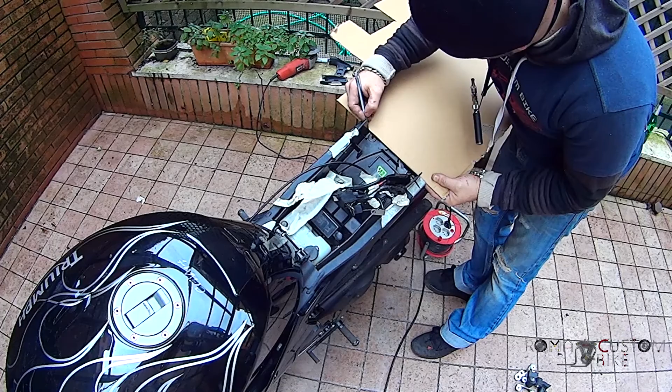In the last episode, while working on the tail's sheet metal, I created a cardboard template for the tail light. It helped me with space management during fabrication and now I need to turn it into a final product. I start by digitalizing the outline of the cardboard template to always have a reference of the available space. Then I like to add the mandatory objects, like the seat lock that we saved from demolition.

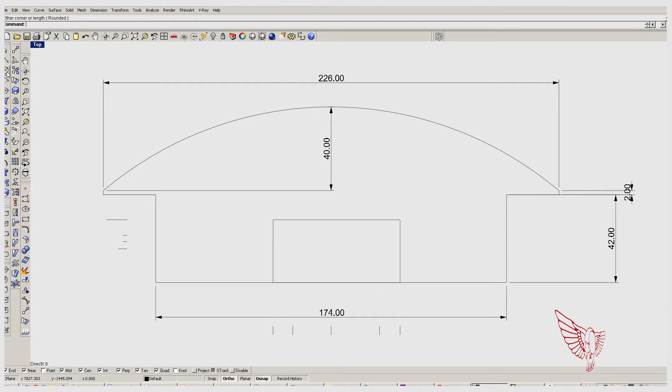Once all fixed parameters are set, it's time to start with the creative design.

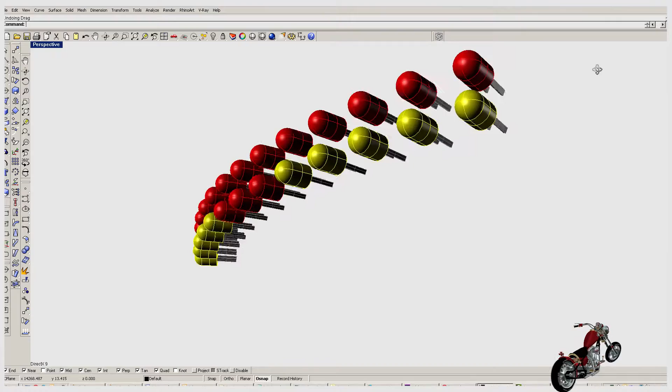I've decided to include all lighting functions in the tail light: the marker light, the stop light and the turn signal. To get this result, I decided to use two rows of LED lights, the top one for the brake light and the bottom one for the turn signals.

I start by drawing the 26 LED lights that constitute the two rows. The first 5 LEDs from both sides of the bottom row will be yellow for the signals. The rest of them will be red.

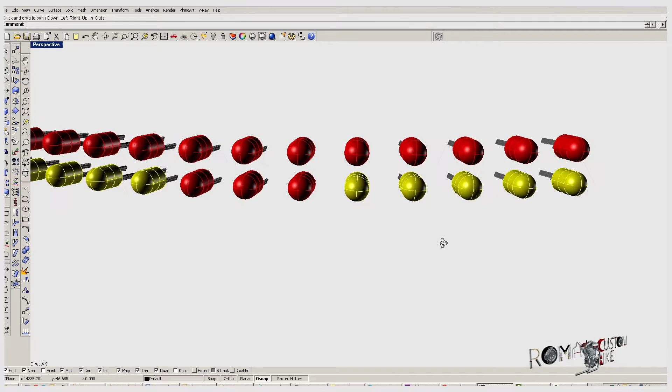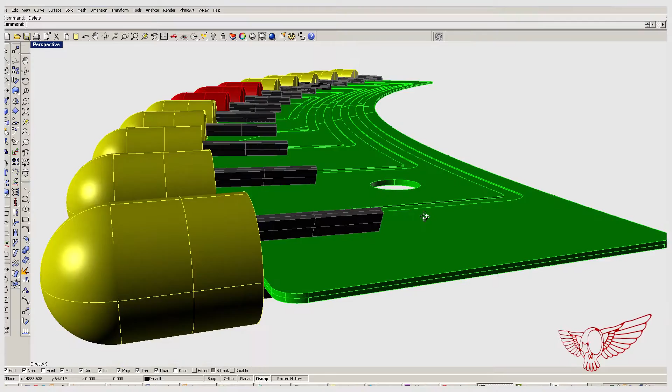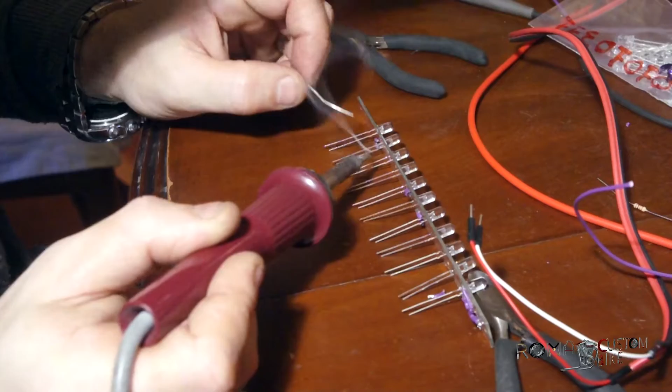With the limited resources at my disposal, I had to figure out an accurate system to install all those LEDs in a small space and with the needed precision. I decided to use a dual-sided PCB board so that I could solder all the cathodes onto one side and control the signal to the anodes independently on the other. We'll get into more detail in the next episode where we'll be talking about all the electronics of the project.

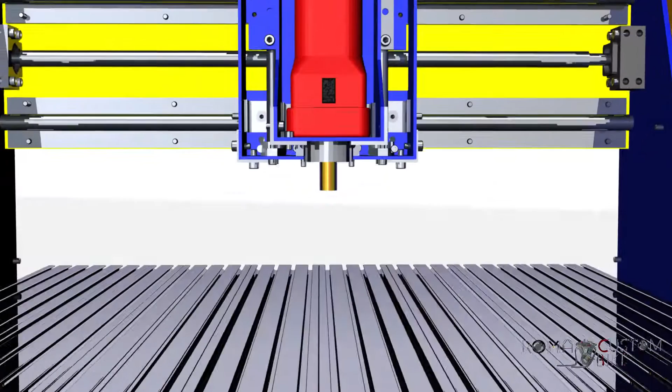Now, let me do a little consideration about CNC machines and their limitations. Even though the objects they create are actually 3D objects, most machines have 3 axes and can be considered like 2.5D. That's because they can move freely onto 2 dimensions, X and Y, but they have limited control over the Z axis. Without a 4th or 5th axis, the end mill can only plunge onto a stock at 90 degrees. For example, my CNC couldn't plunge diagonally into a piece.

So, with these limitations in mind, I decided to split the tail light in 2 halves, split horizontally. This way I can carve the necessary pockets to house all the electronics.

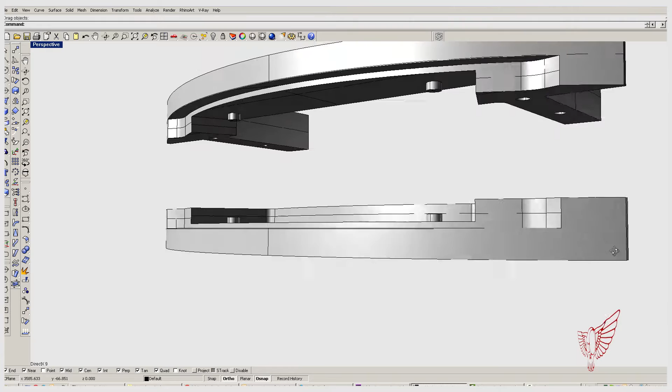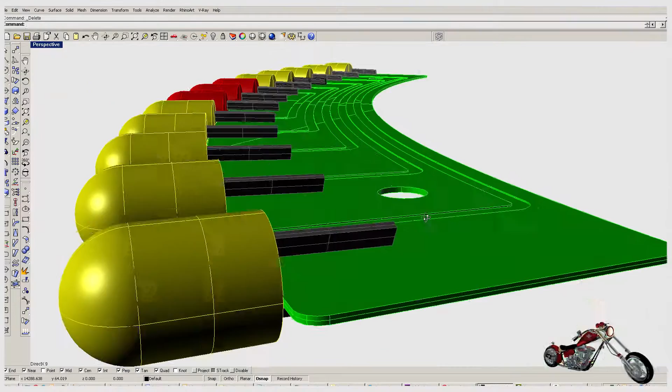Starting with the outline of the bottom half, I extrude a solid object. This represents the stock from which we'll be carving the final product. I've already prepared a 3D model of the PCB with all the LED lights on it so that I can use it as a visual aid for the designing process. This could also be done mathematically, but this way I'm less likely to make a mistake.

To install the PCB inside the tail light, I create a pocket in the aluminum block. In 3D software, this is usually done by subtracting one solid from another.

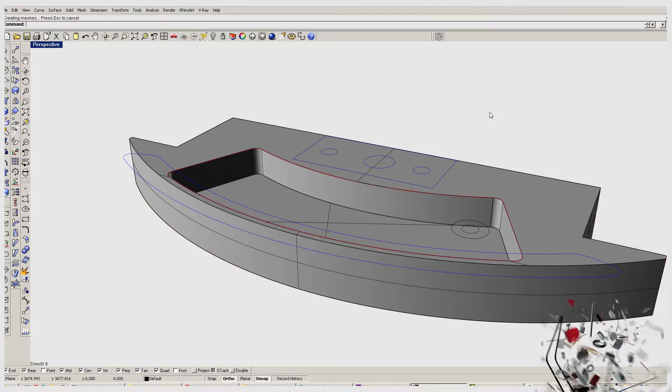Then I add 2 spacers. This will allow the PCB to be fastened to the casing while leaving enough space for the components and for the wiring.

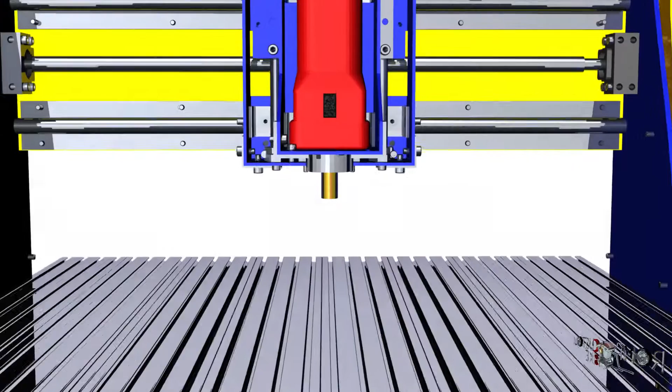Now I have to figure out a way to design the backside so that the light can be seen. As I've mentioned before, my machine can only plunge vertically onto the piece, so I need to come up with some other solution to work the backside of the tail light.

I figured I can make a flat plate with holes for the LED lights and curve it against the shape of the casing. To do this, I create another pocket that can generate an edge that I can use as a frame for bending the plate.

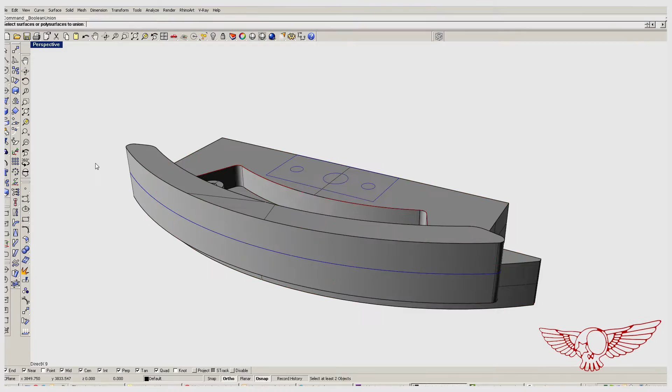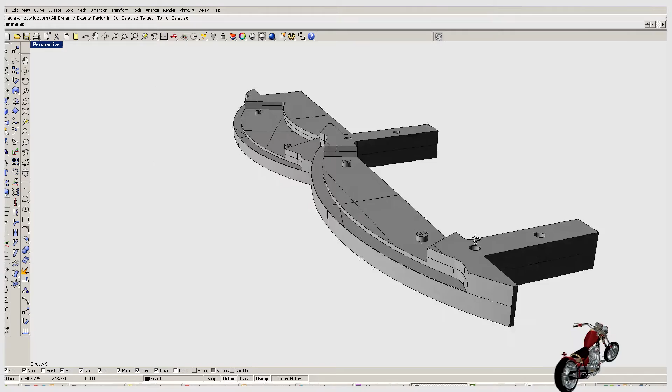The process is then repeated for the upper side. The differences in design are dictated by the necessity of accessing the circuitry, the position of the frame bars, and the relative position of the mounting bolts. Summing and subtracting solid from the original stock, I finally reached the end product.

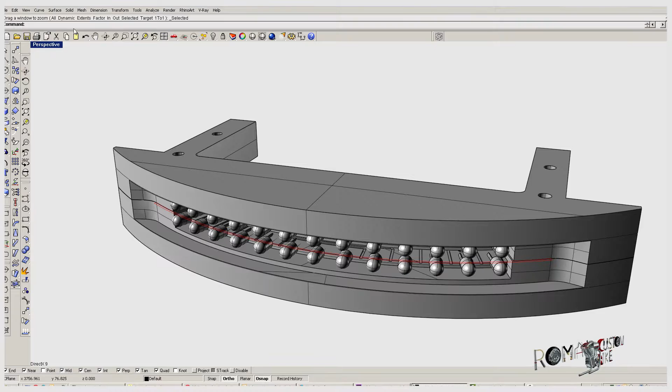This process of subtracting areas from a digital solid is not so different from what we're going to do later with the CNC machine, nor from what a sculptor does. So, to quote the great artist Michelangelo, also an Italian...

Every block of marble already contains a statue, the sculptor's job is to discover it. Well, for me, every block of aluminum contains some crazy ass shit, and Roma Custom Bike is here to rip it out! Yes!

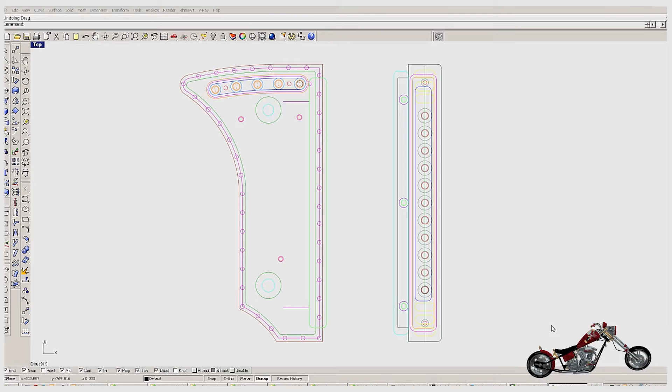With a similar technique, I also created a part that can combine style and functionality, while accenting a prominent feature on the bike, the radiator. It will provide better illumination to the area immediately in front of the bike, rarely lit up by stock lighting, and the turn signal function.

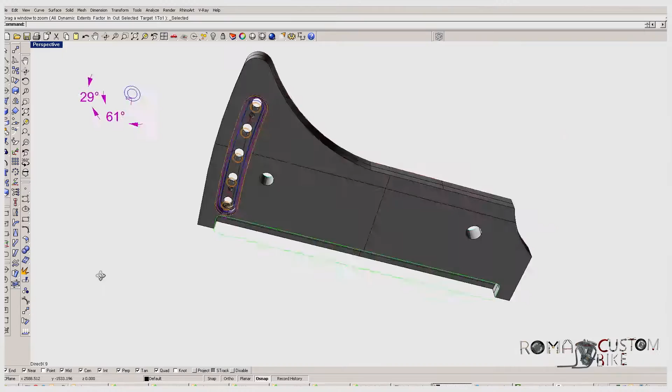This accessory is made out of two pieces carved in such a way to conceal the electronics, just like in the taillight. All the different pockets are staggered to allow support for the different layers of components, first the PCB, then the covers.

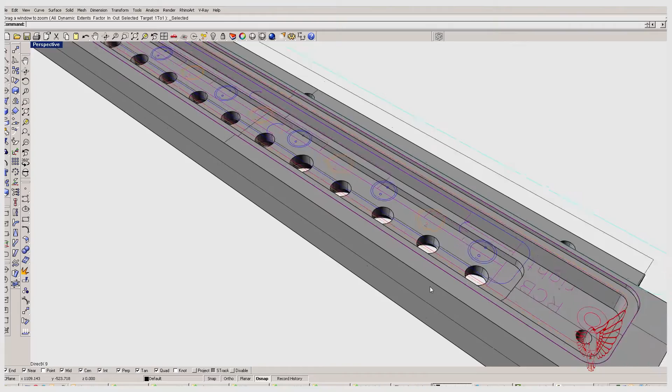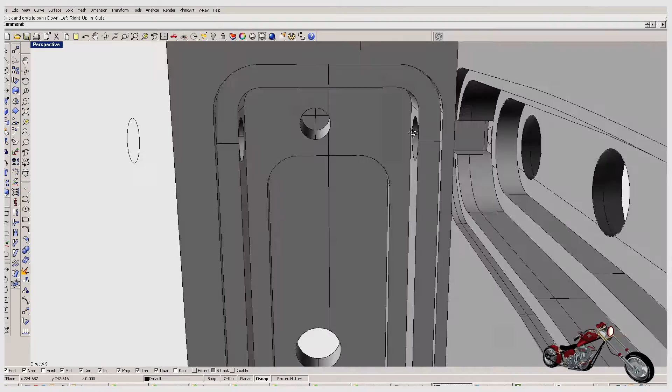I also had to create some communicating passages for getting the wires from one piece to the other.

I think I already got quite technical in this episode, so I will not bore you with the toolpath creation process. We'll see that maybe in another episode.

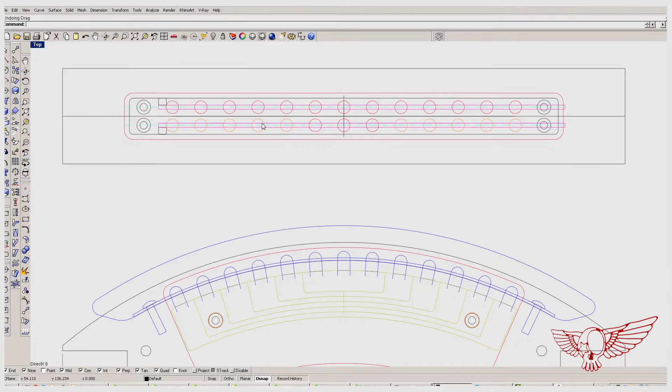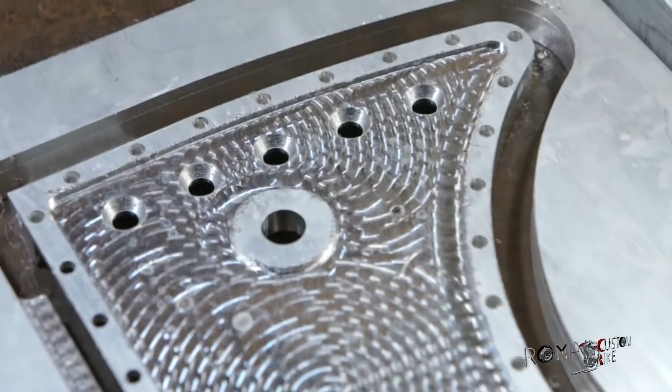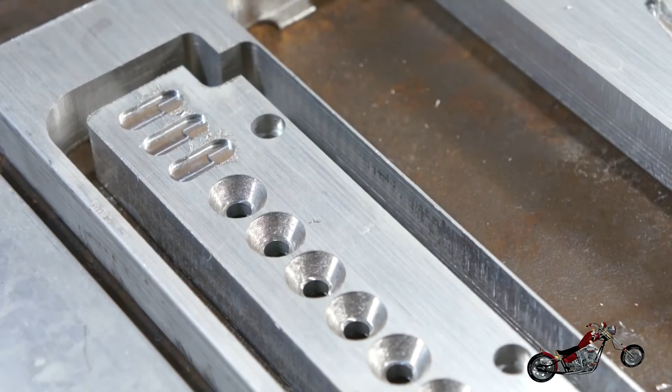These are how the pieces come out of the machine. The useful parts are still attached to the aluminum stock. Those little tabs that you see are needed to keep the part fixed to the table all the way to the end of the machining process. In more advanced machines, the workbed is equipped with a vacuum pump that can keep the piece stable without the use of those tabs.

This is not my case, so I need to remove them using a nibbler, a type of shear designed to keep edge deformation to a minimum.

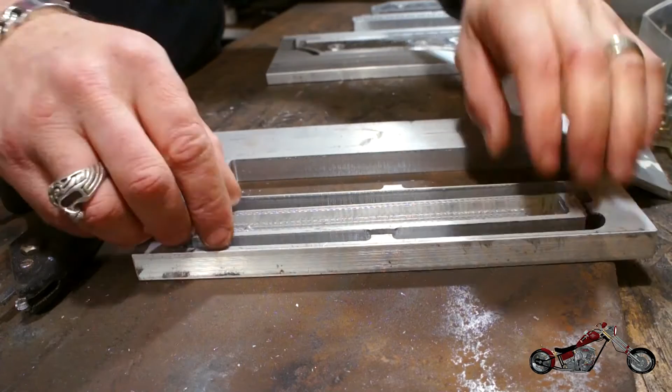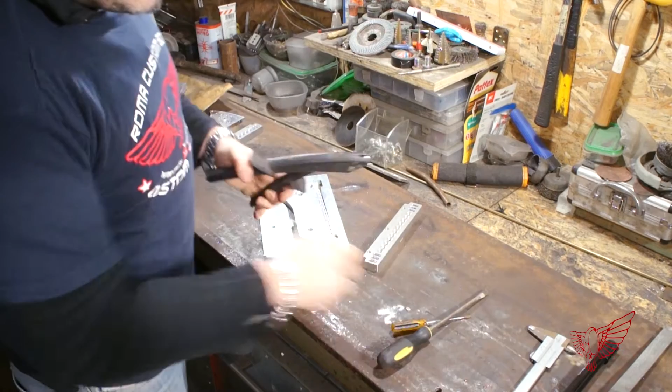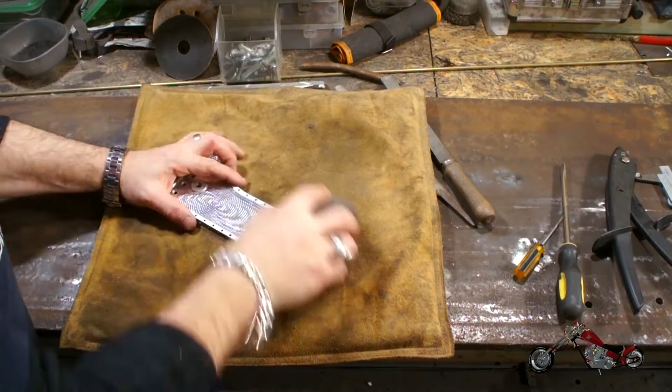The parts are now free from the stock, but don't match together properly because they're still too rough. With my usual abrasive sponge, I smooth a bit the corners, made very sharp from the accuracy of the machining process. Then I remove the tabs. They're quite thick this time because of the size of the pieces.

To do so, I use a file, a coarse one. It saves some time, but it can make some major damage, so watch out. I finish up with a sponge until there is no longer any sign of the tab.

The process is repeated for all the other pieces. I keep them in my hand so I don't risk marring them in the vise.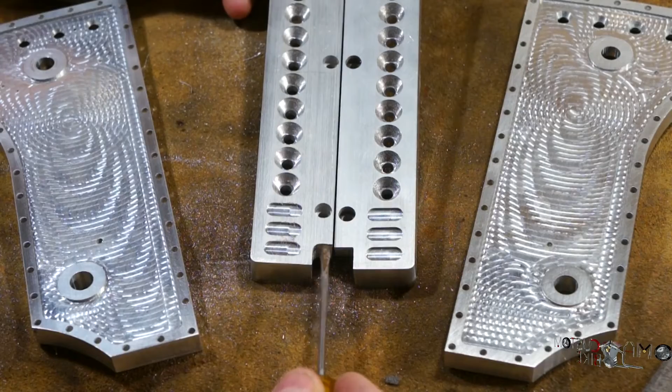Another limitation of the CNC machine is the impossibility of creating a sharp inside corner. The smoothing of said corner is always dependent on the radius of the end mill used to carve the pocket. So pieces such as this one need to be touched up by hand, or I won't be able to clamp the two pieces together. In the machined part, this corner is rounded, but it should be a 90 degree angle, like we can see in the 3D model. So it needs to be worked by hand with a file.

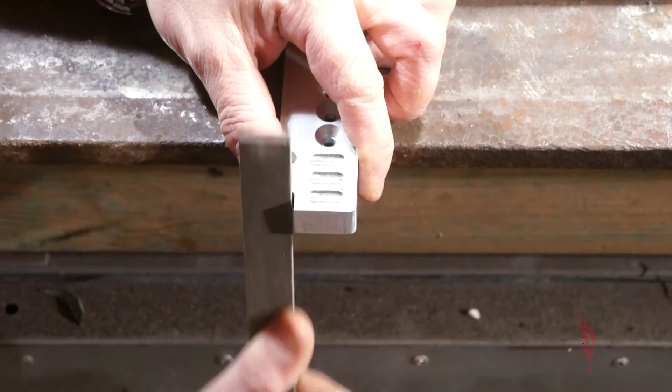This process needs a lot of patience. I have to keep the lines as straight as possible, or the mistake will be visible in the final product.

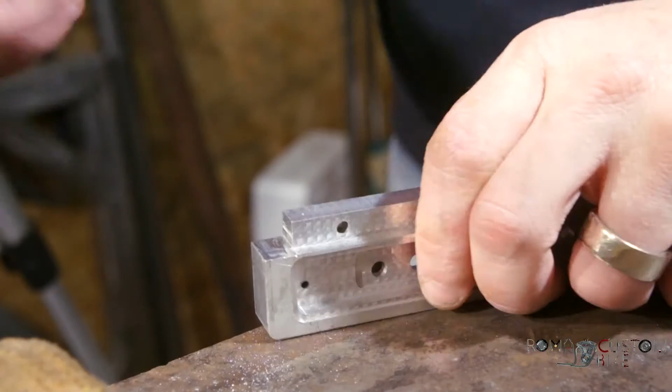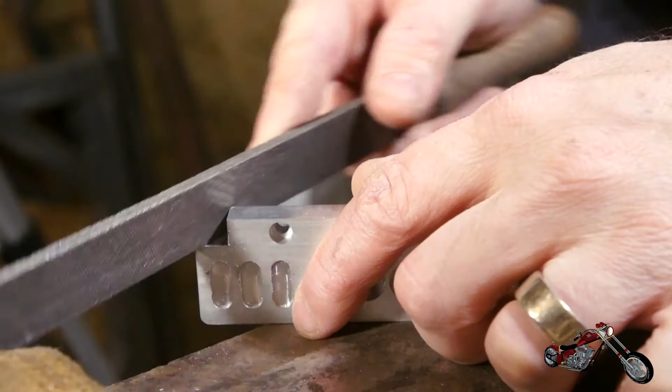The same problem is in this other point, but this time we have to round the male insert to fit into a rounded inside corner on the other side. By rotating the file continuously, I try to create an even curve between the two planes, and I keep on grinding. Nobody can say that these parts are not handmade.

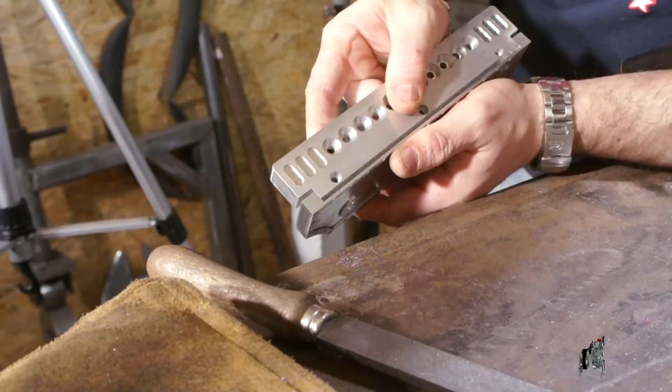When it's getting close to being good, I start doing matching tests and final touch-ups until the two parts fit together perfectly.

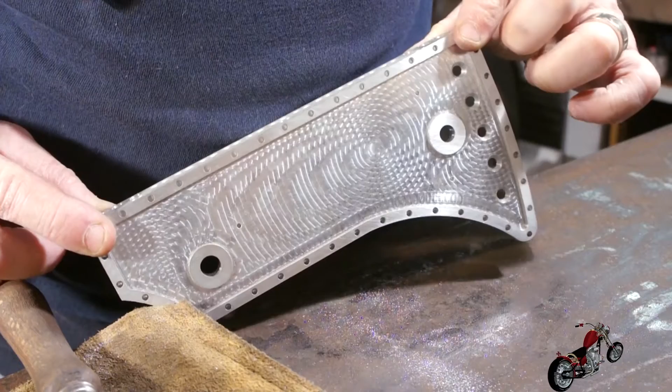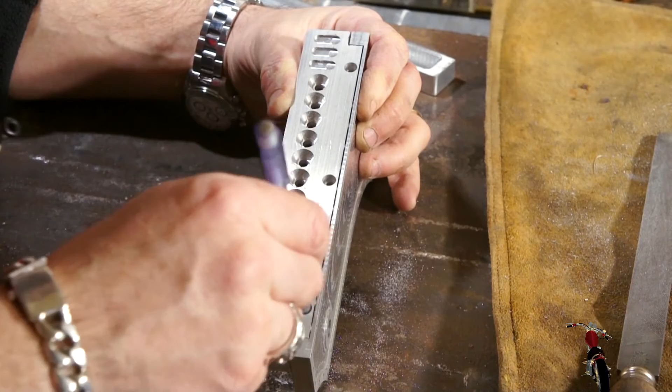Now it's time to make the threaded holes to bond the two parts together, and since my CNC machine cannot do side carvings, this also will be done by hand.

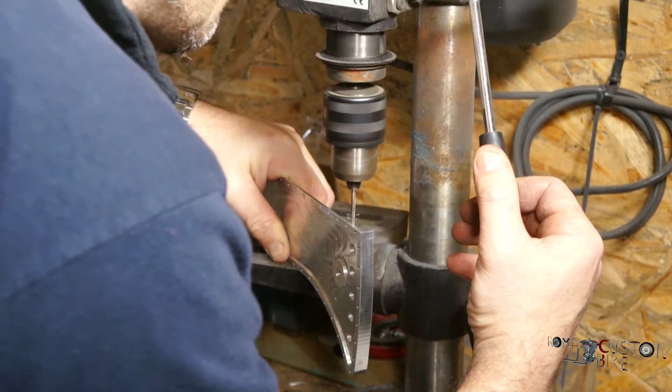The bench drill helps keeping things perpendicular. I bought this drill for about 60 bucks about 6 years ago, and it has served me well. Now, it's not the most accurate thing in the world, but with a little care, it's accurate enough.

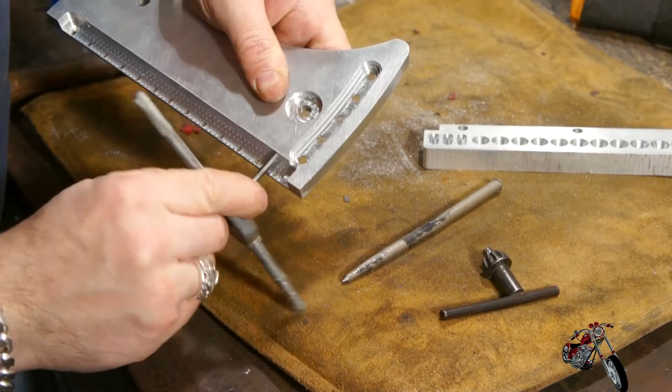The holes now need to be threaded, and let me tell you, I hate threading holes. 1 out of 4 times I mess it up. Maybe you guys can give me some tips.

But anyway, the holes are done and the parts match perfectly.

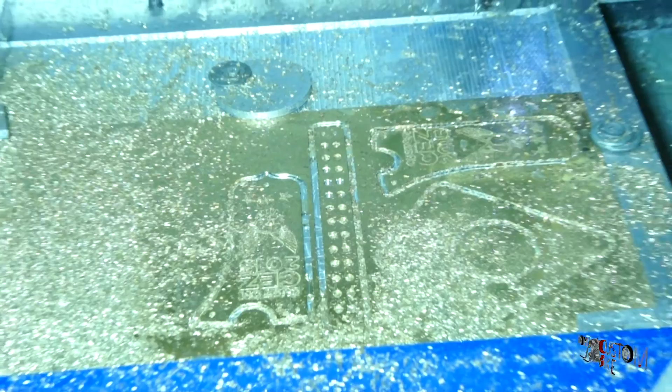In the meantime, I've also machined all the brass inserts for the turn signals, the LED retainer bar for the taillights, and a piece for Polski's bike, but we'll talk about that in an upcoming episode.

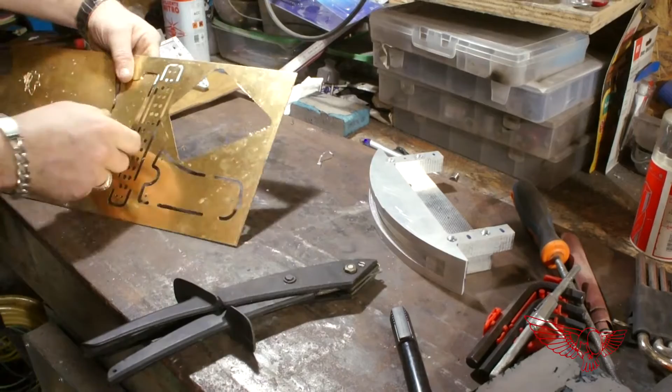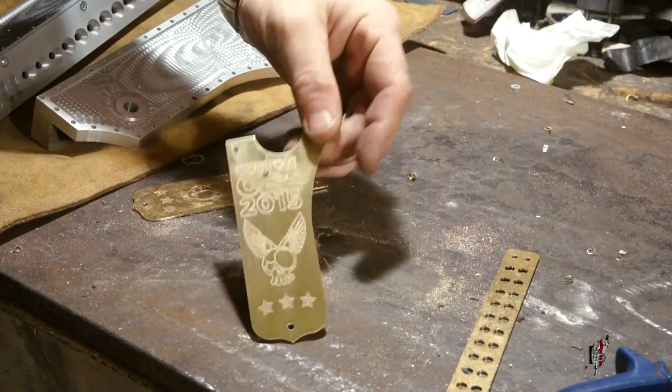Just like all the aluminum parts, the brass parts also need to be freed from the stock and cleaned up. Here is a first glimpse at what they look like, and I would say it's coming out pretty cool.

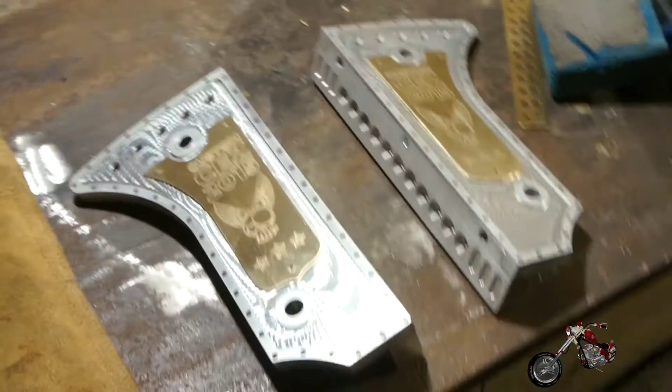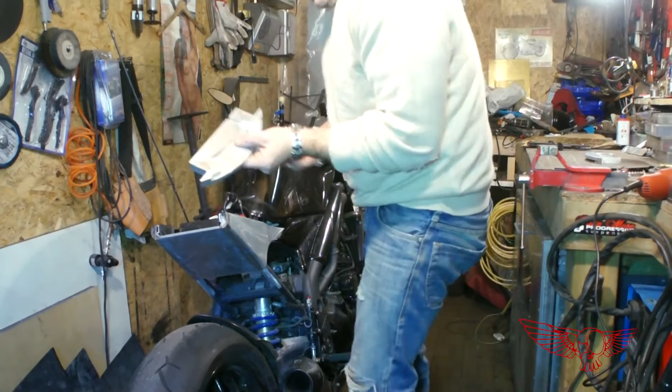The same cleanup process was done for the taillight, and now it can be installed on the frame of the bike. I first removed some more plastic to make it fit.

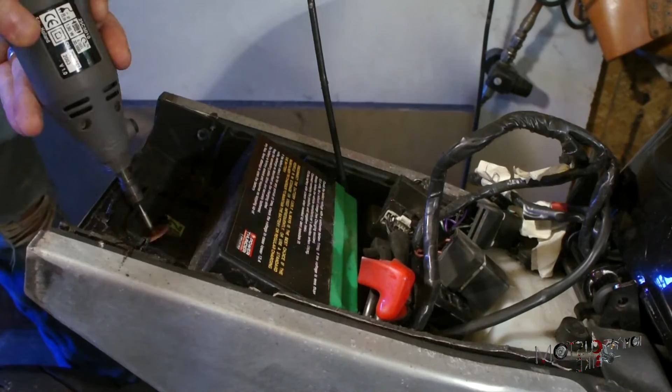We seem to want the glory, we seem to want to earn respect, but what it takes to get that done.

Beside the obvious lighting functions, this taillight serves the important purpose of closing and framing the tail end of the bike. The lines have to match perfectly, and as you can see right now, they're not.

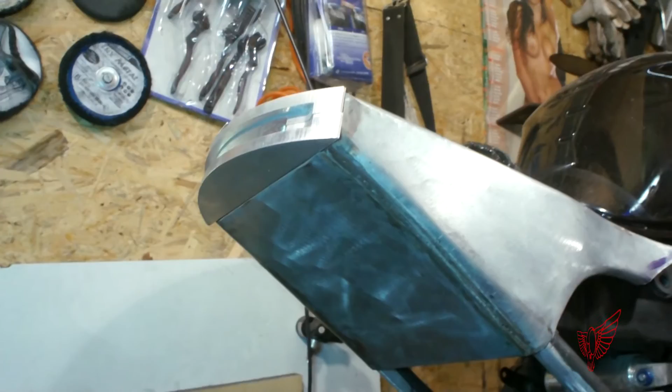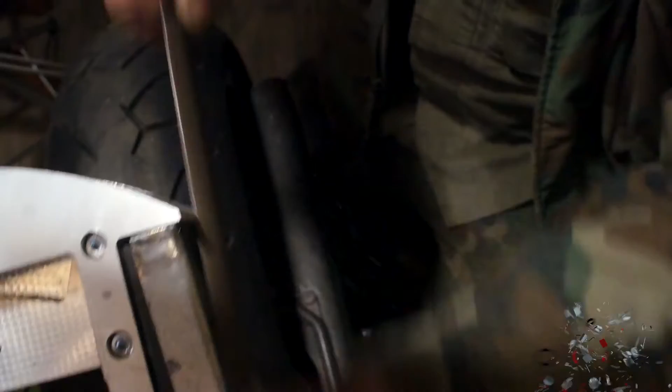But that's what I wanted, because since the fairing was made by hand, I knew that I could not match the shape with a computer-made model. So I figured out that I would make the piece bigger and bring it to size by hand.

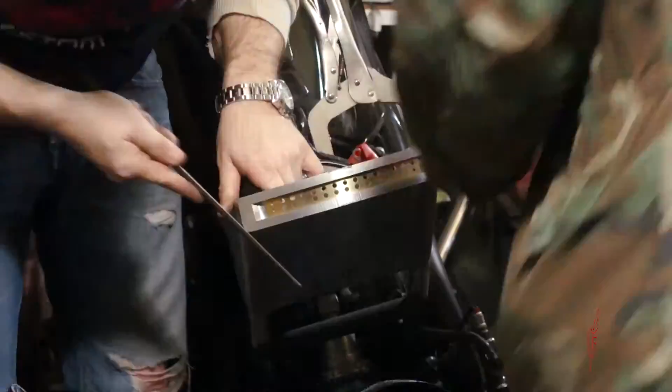As you can see from the trash bin, I had to fuel with plenty of beer Jacek's help, but his help is always priceless. So we grabbed two files and we started to create the curves to match precisely the curves of the sheet metal.

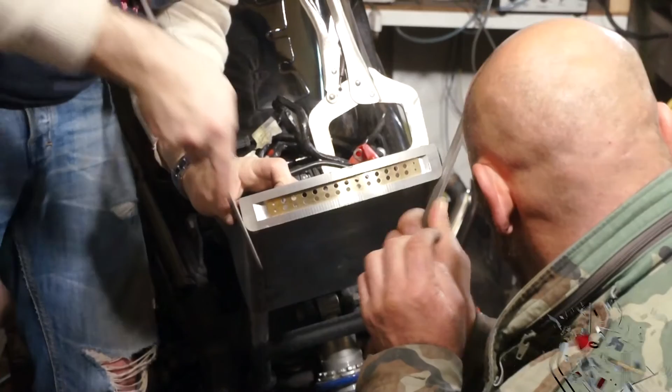I don't really want to spoil the surprise by showing you too much, because we still have to cover all the electronics part in the next episode, but this is what we will be making.

Just one sign that tells me I'm not alone. Give me just one. Not too shabby, right?

To get to the point, we'll have to develop the Arduino-based control board to manage all the LED lights and turn signals. We'll even have to do some waterproof testing for our electronic components, so that's not too bad either.

In the 4th and final episode, we'll also paint, assemble and unveil the bike.